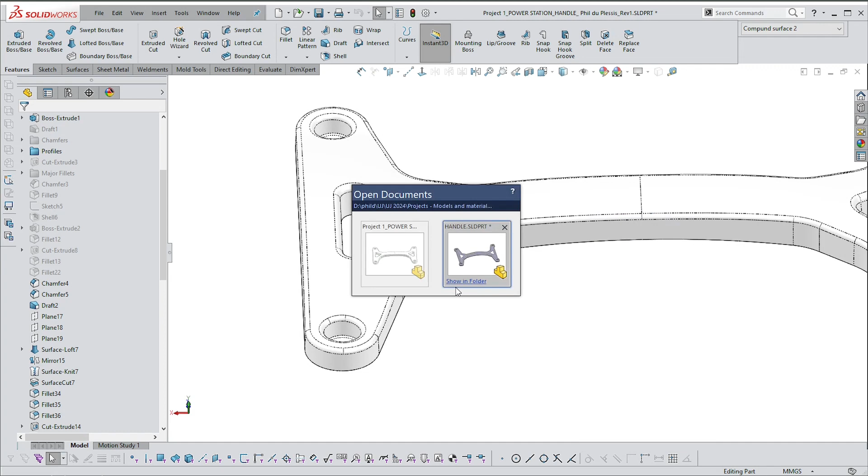It should be just an overall shape. I mean, this could be more curved if you want, but that fillet there, or that chamfer there, is a transition from one to the other - for aesthetic, for cleaning, for usability, and mostly for injection molding reasons. All of those reasons together go into making that feature smaller. It should be smaller than these corner fillets.

I think this one is 5 or something, or 10. So that's 10, and this is 8, but 8 is still too large. That's because, have a look at what's happening here - on the corners, we've got one fillet interacting with another. That shouldn't happen. There should be a land between the two.

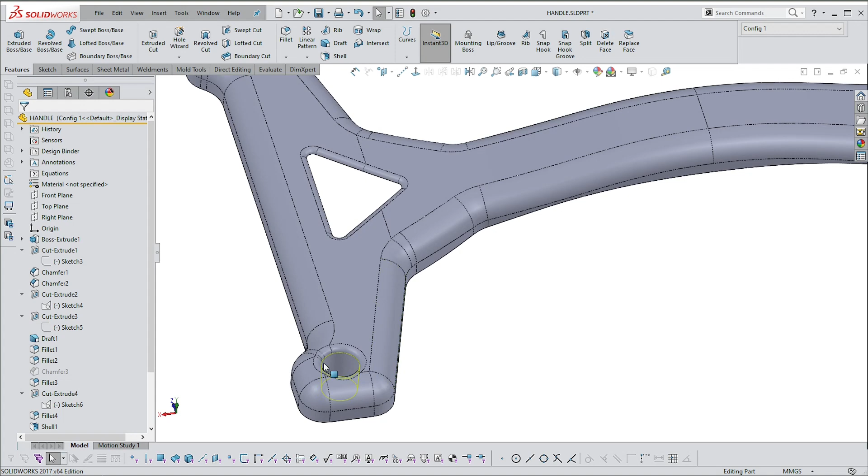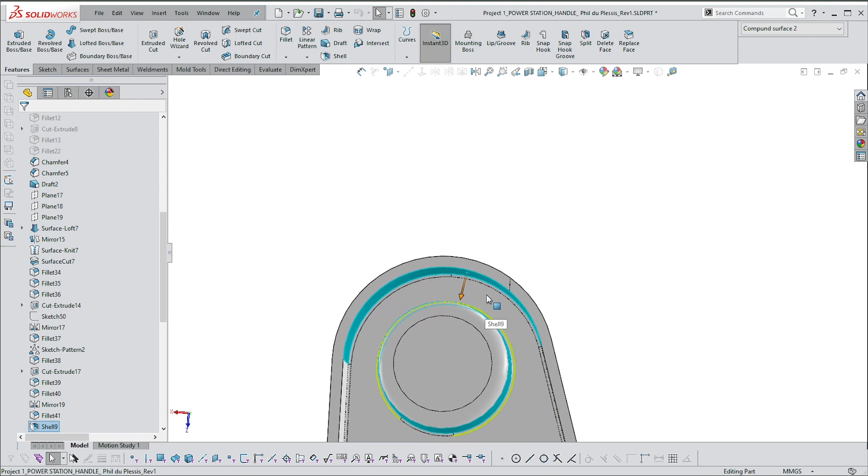So let's explain what that means - there should be a space between the two. That has to do as much with injection molding considerations - between that mounting boss interface and that wall interface, there should be enough space for enough material in the mold that it doesn't become weak or too thin, and that there should be smooth flow, because you've got to get the material to flow smoothly from one end. It's going to be injected somewhere in the middle here, and it's got to go all the way out to the ends, and then join together somewhere over here and knit without creating knit lines.

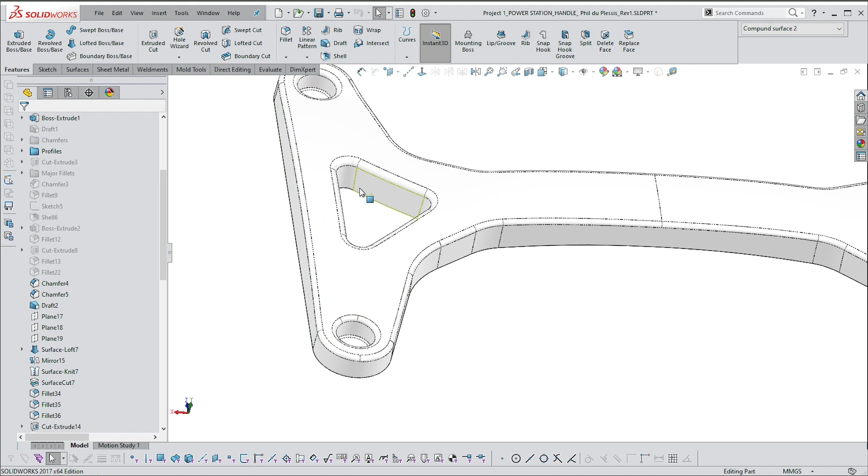So all of these surfaces - a lot of you have given me a sharp edge in here, very bad. I'll show you what I mean in this one here. All right, so design considerations, very important.

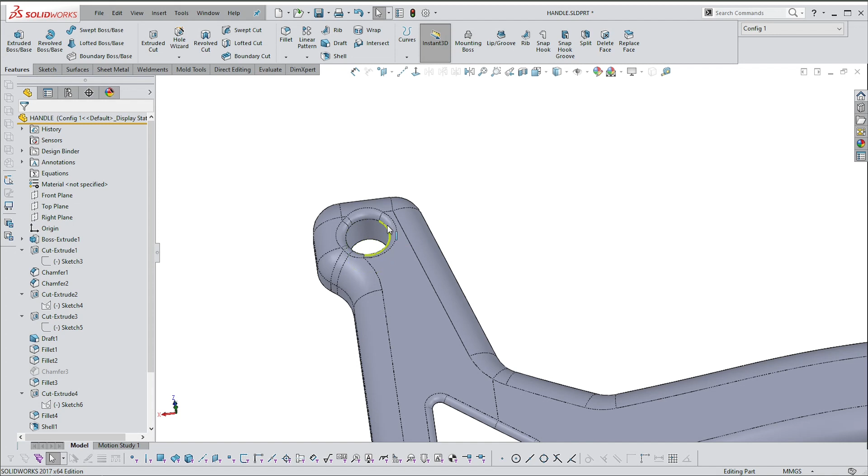Many of you have given me a hole all the way through, a shaft. It's not what this is - this is a mounting boss. Please, it must be a mounting boss. It must have a land on the bottom with another hole so that a screw can actually grip that hole on the land and connect this to the other thing. Otherwise, this is not doing anything.

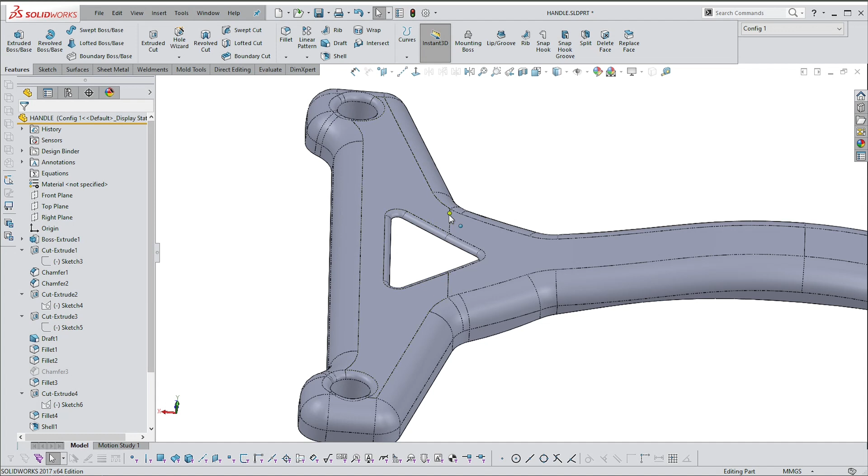Likewise with this feature here, this cutout - the cutout can be decorative, but then it must also contribute to the strength. So let's address that one there, this triangle, while we're at it. That's because whoever did it, and that was a few of you, put the triangle cutout beneath the shell cutout, and it should be before it.

I don't care if there's a modeling problem that's created by that. You are here to tell the program what you want, not have the program tell you what it can do. You must overcome those obstacles, and they're fairly easy to overcome by just making sure that everything is tangential. I'll show you how that works in a second.

So many of you have not got, for instance, these fillets. Let's just suppress it, and then let's add one in here just to show you what you would have - 2 millimeters, I think. Okay, this is not in any sense desirable.

One, from a molding point of view, you're not allowing material to flow very nicely. Two, from a strength point of view, that's creating a stress point. You don't want stress points. It's an actual thing that happens where materials can't go around corners properly, and then they create stress lines. So that's a place where this handle's going to fail, it's going to break.

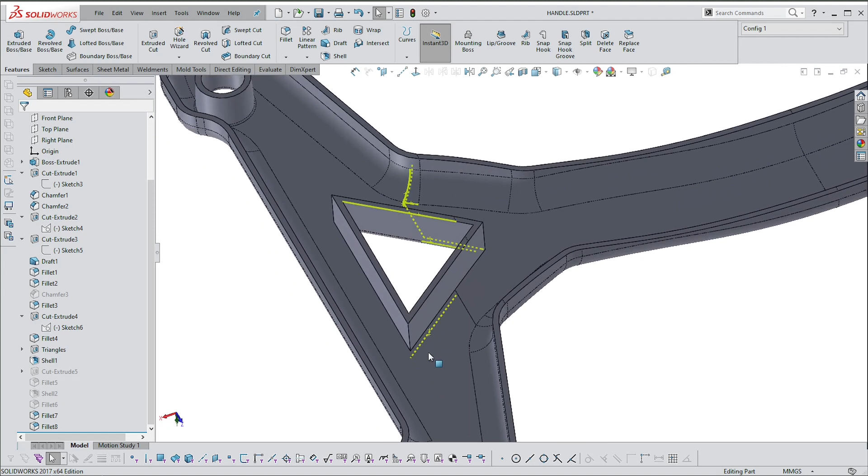To create the mold is very, very difficult - you've now got these sharp edges on the inside and on the outside. So nothing about that makes sense. It should be a nice largish fillet - that one's too small.

Let's say 5 or something. Okay, it should do something like that. All right, so those are the design issues.

Aesthetically, then the other one - many of you have given me a handle which is like 80 millimeters wide. I don't know how anyone has a hand that size to grab a handle that big. Please make your handle the right size. Have a look at the anthropometric data.

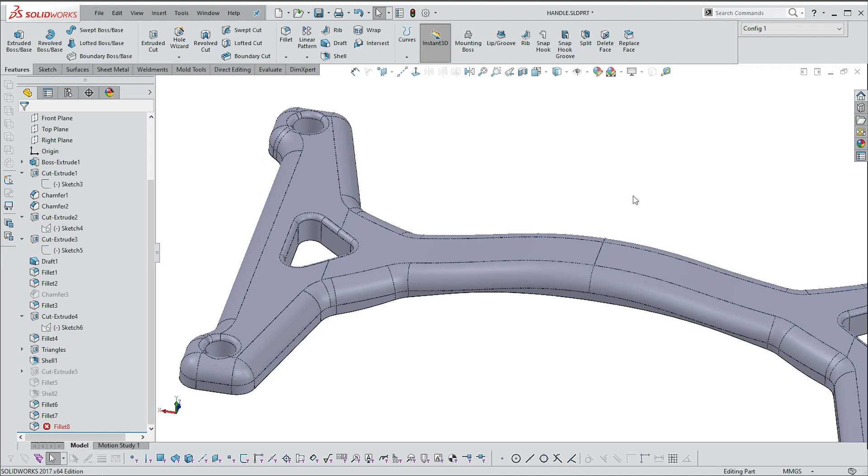I think the diameter is somewhere between 30 and 40, I may be wrong, which is optimal for people to hold. So find out what that diameter is, and then the circumference of that diameter will give you the sort of measurement. So you can actually measure here.

I'm not sure if I'm going to be able to get this right, but you can keep clicking these. 1, 2, 3, total length 40. You can see he has 40. So probably total length of around 80 or 70 if you go all the way around.

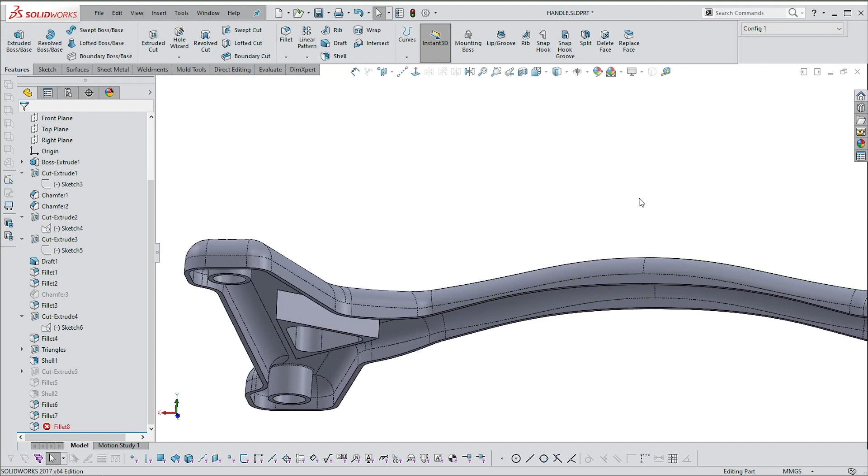A few of you also give me very dramatic, swoopy handles, which give you just a smidgen in the middle that's optimal to hold, and the rest is so wide it's not nice to hold. So please look at that.

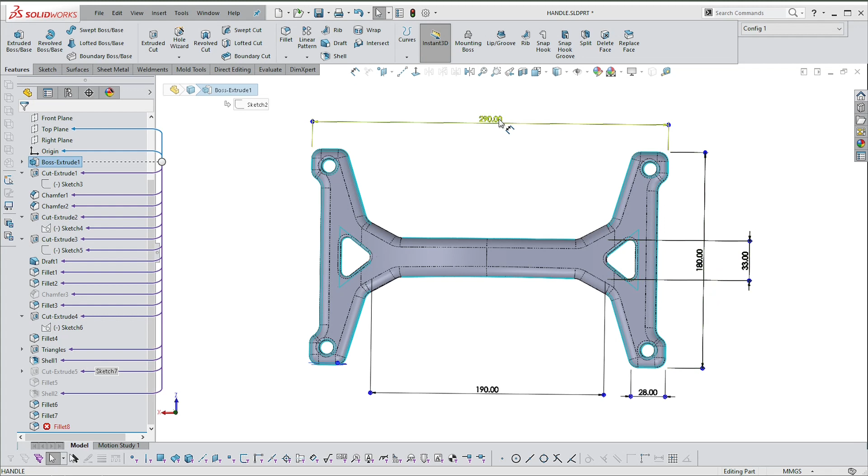Some of you have also given me - let's go to this item here. You can see the footprint here is 290 by 180. Please stick to that, 290 by 180 is about an A4 size.

If you give me a handle which is 120 millimeters by 80 millimeters, if I measure that on a ruler, go and do it for yourself. You should be able to shake your own head and say that's ridiculous, the handle can't be that size. We're designing for the real world, real products with real aesthetics, real design considerations.

I'm looking for those things. I will be marking you accordingly to them as well. All right, so now to the actual technical aspects of the sketches.

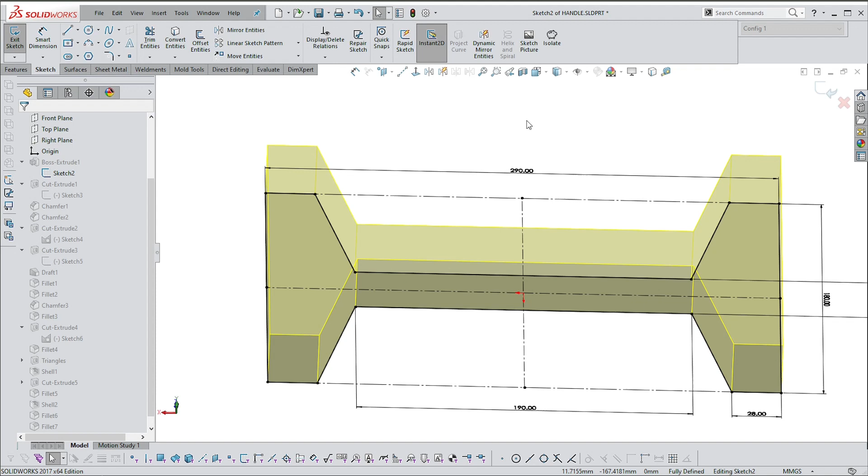Many of you will have given me a sketch which looks something like this. I've actually resolved this, so I'll have to unresolve it. Not sure where that is. Let's just get the midpoint, probably coincident, and midpoint. There we go, that's gone.

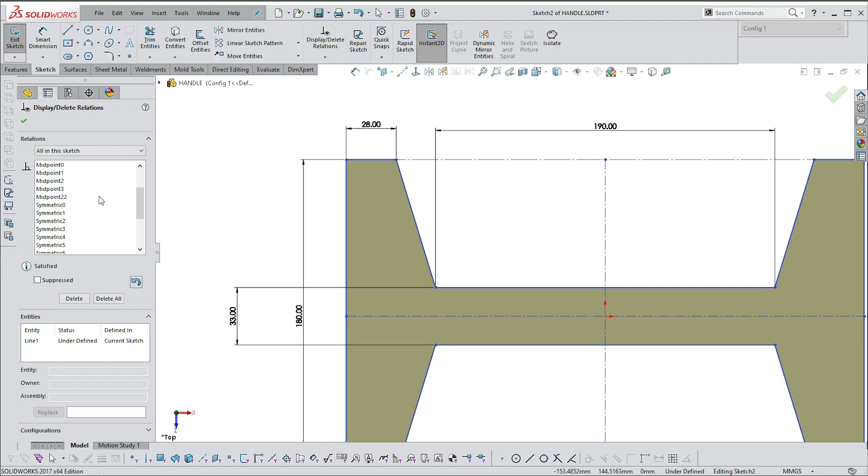So you will have gotten a sketch which is fully dimensioned and is a good sketch because it's nice, it's closed, it's gone grey in the middle, but it hasn't turned black. It must turn black, full stop, no questions asked. If it doesn't turn black, it's not fully defined. The whole thing must turn black, especially on a simple sketch like this.

On splines we're going to be a bit more lenient for now, until later. You will have to then make sure that happens.

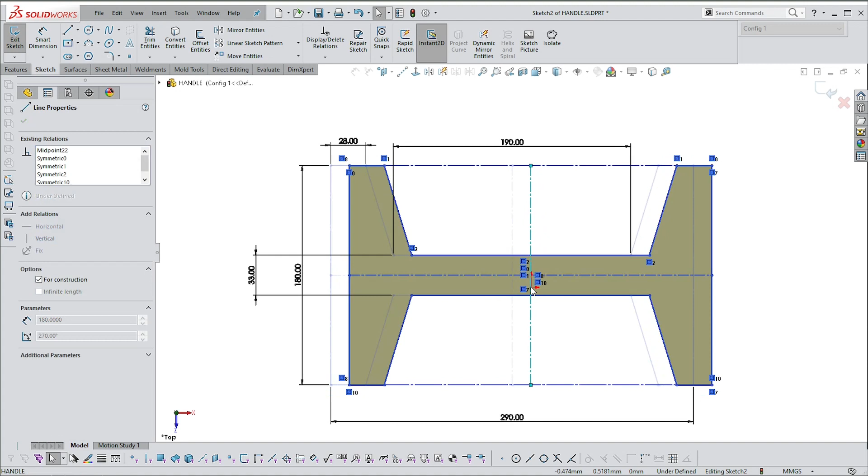What you can try to do here is grab the center point, drag this out. No, you can't - all right, so you can drag that out, and then here you might be able to drag this back onto that piece. But if you can't, like I can't, just Control select between that midpoint. Make sure the center lines meet the bounding box, whatever that bounding box is, so you're grabbing the center line of both of those lines. Grab that point and then make them coincident, and that turns fully black.

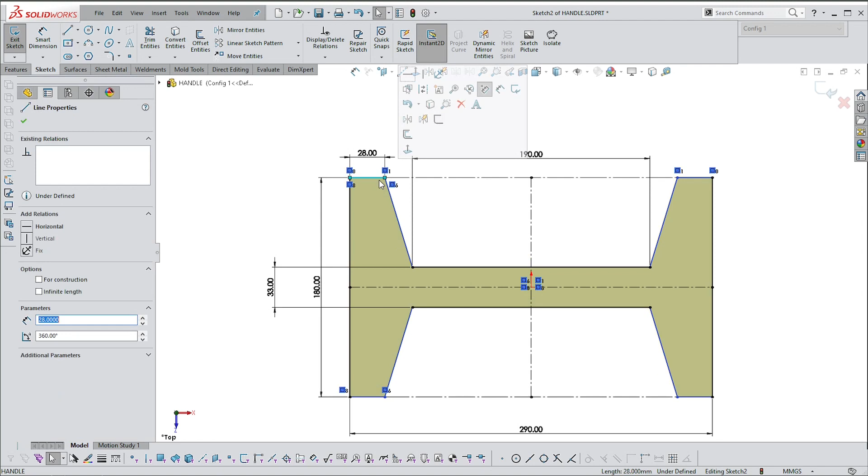Although it's not fully black - I think we're missing a dimension here. What are we missing? So what you can do is drag it. There we go, okay, I can see what's wrong. So that just means this here needs to be one of these, or both of them need to be made horizontal. There we go, fully black.

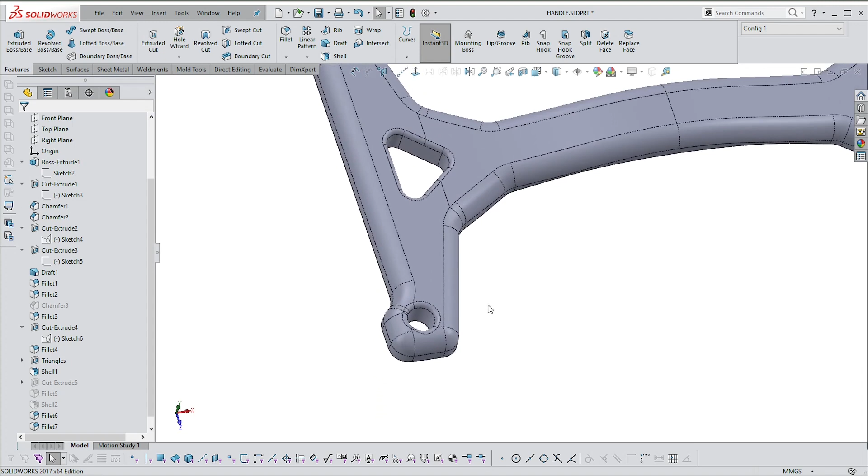And that's what I'm looking for. Sorry, one thing I didn't speak about here - the rationale for this particular shape. Originally in my design, the original sketch was squared off, which is what most of you have got, and then I used that to show you how you can create a completely rounded-off end.

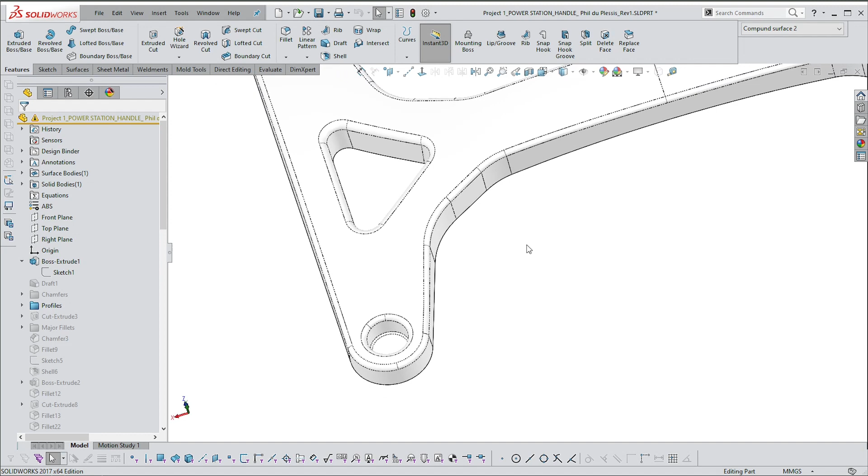So this design has a rationale to it, which is that here's the mounting point. The arms of this item wrap around that mounting point in a uniform, rational fashion. That's rational just from the point of view of visuals, but also from the point of view of what makes sense as a design feature for tooling and for mold flow and all sorts of things.

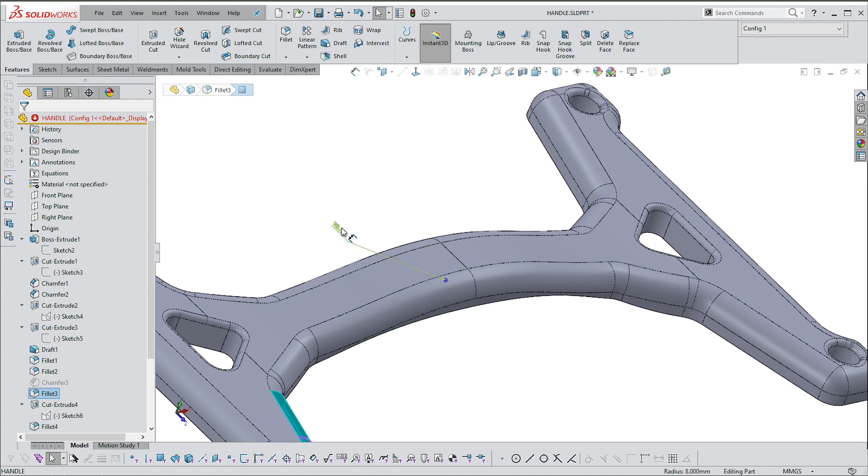So this is not nice. This is not acceptable. I want to see something more considered than this. This is just thrown together. So let's change this and see what happens. Okay, so that's looking better immediately.

This might make sense if this cutout were a little bit more considered. So let's have a look at that cutout, because this is what I'm also seeing a lot of you doing—seeming to copy from one another quite a bit. Please watch out that you don't copy other people's mistakes. Please don't hand me a sketch like this.

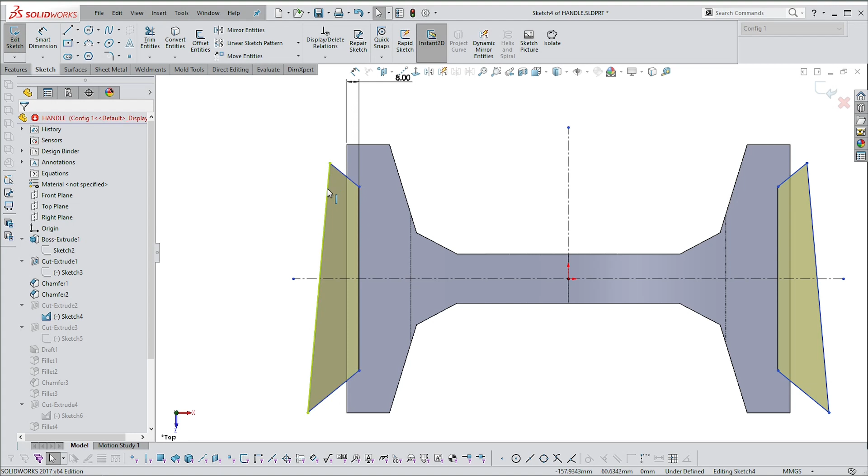It needs to be fully defined for a start. So give me one offset dimension—that's good—but it also needs to make sense as far as being something which is fully controllable. You can only do that when you're systematically making things vertical and horizontal when they should be, giving items dimensions where they should have dimensions.

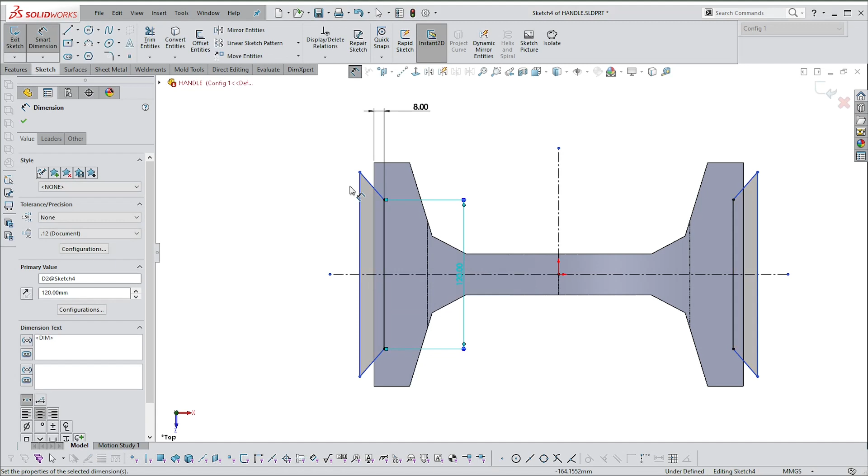This should either have an angle or have a dimension over here, one of the two. And then this should be controlled as to how far away from the edge it is. So that should then be something like that, and make sure that they are mirrored on both sides.

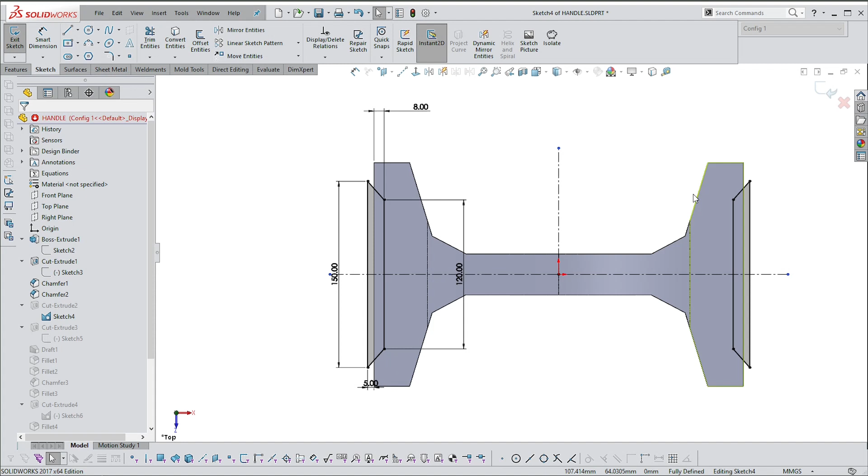Okay, so that's looking more acceptable. I would round these a bit more, and I would make this a little bit smaller to give a more considered space around here. This doesn't have to be fully symmetrical by any means, but give it some space.

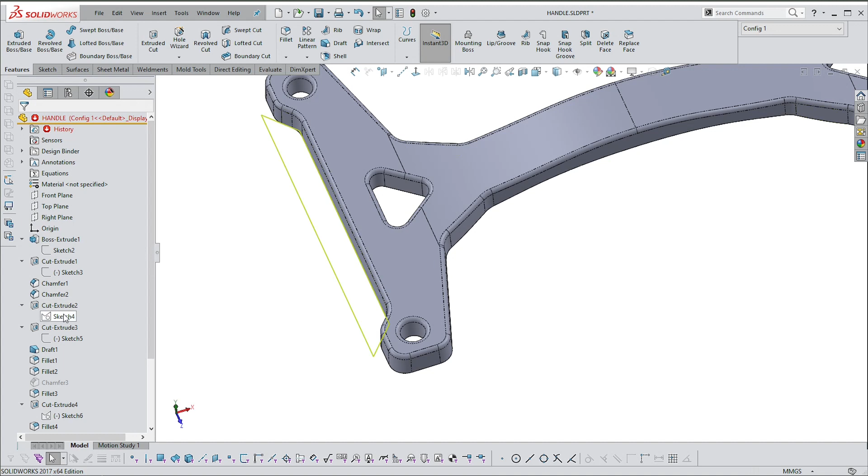Okay, so what else? We've dealt with that. Let's deal with this sketch. Here, a lot of you have done this, right? So you have a spline, which is great, and it is.

I can have a look, and I can see that you have the symmetrical marks here—I just mouse over and I can see the symmetrical marks. I can see that it's tangent in some way, but you're not giving me full tangency. In fact, I've probably fixed this up already... no, I haven't. This line needs to be tangent to one of its edges.

So let me just get rid of this line. Okay, so that line should be tangent to this edge—tangent. So I'm going to look for those marks. I'm going to go in here, and if I don't see a tangency, that's going to lose you marks.

So this doesn't have tangency. Click on that edge, that edge. Come on, that did not work.

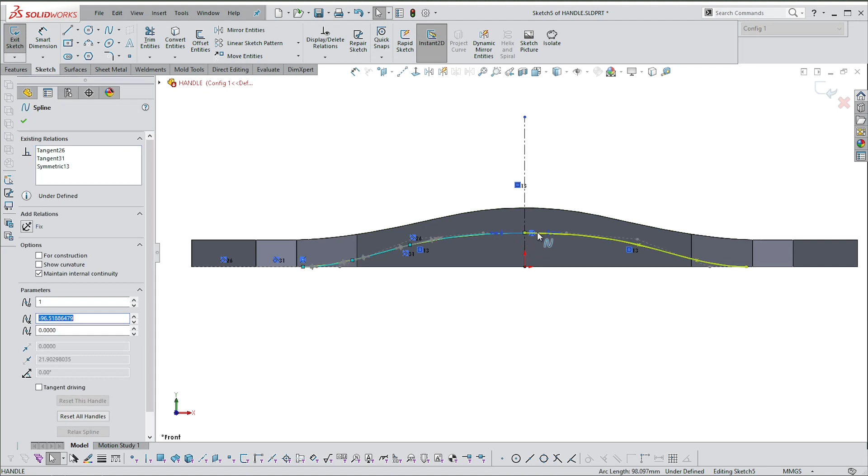Okay, tangency, and then these two should also be tangent. At the moment they are tangent because I put that in, but many of you don't have it, so make sure if you've mirrored an item across, it does meet as a tangency. You can check its tangency by not being able to pull these handles up or down—you can pull them left or right, but not up or down.

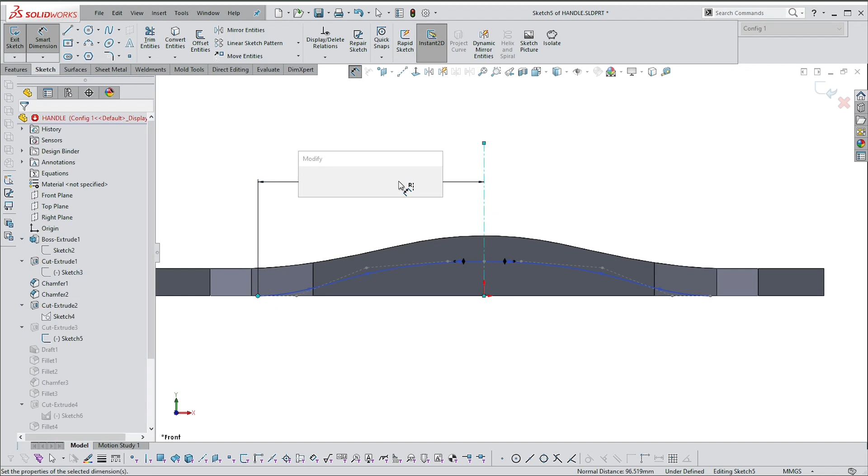Okay, and then many of you have dimensioned to the center line. It's not what I'm looking for—it must go across the center line. So this is not okay, and you should have some dimensions in here. So it should go from there to there, and similarly from that point to that point.

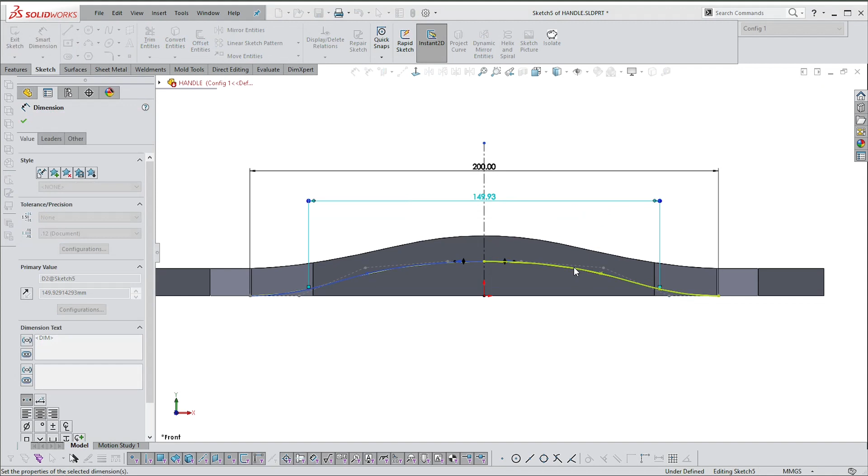Okay, so I think that kind of covers it. If I've forgotten something, you can send me a message.

The chamfer side—yeah, okay, some of you have put chamfers in, and I've had a look at your geometry, and I can see why you've put in very large chamfers. It's because smaller ones wouldn't work, and that's primarily due to the shape at the bottom not having sufficient tangency.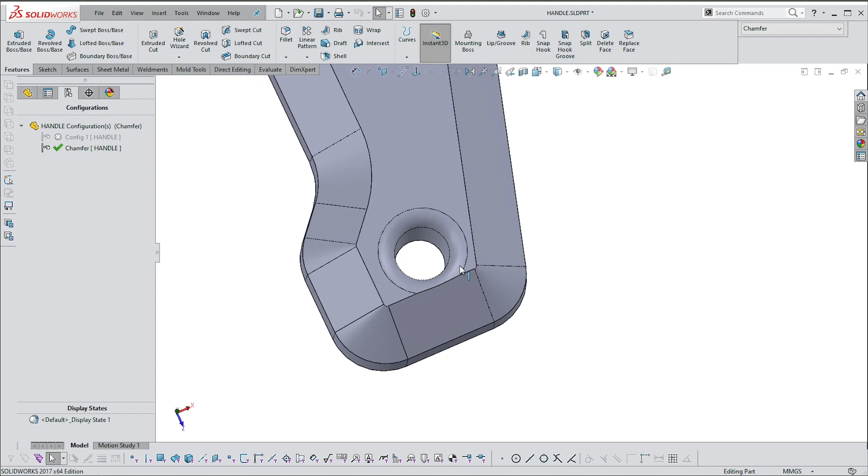This is completely unacceptable. This, as far as a manufacturable thing, is like a nightmare. You can't hand me this and say you still understand injection molding—this is not how you would do it. So please make this a reasonable size.

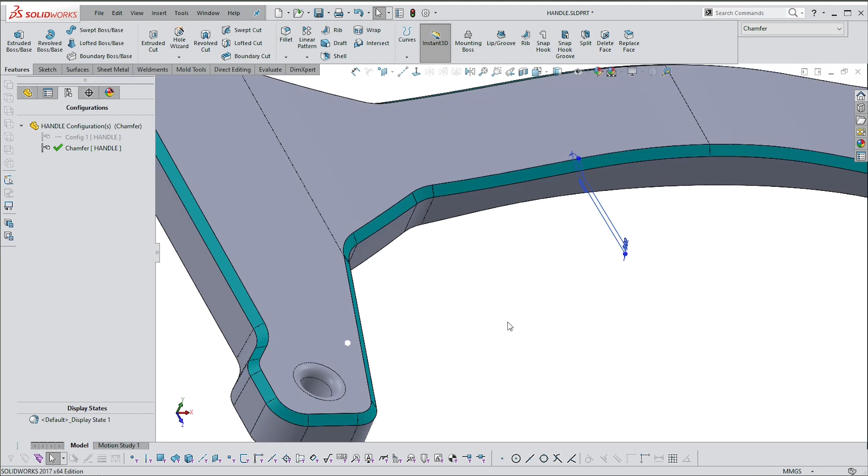And if the geometry isn't working, if it's not doing what you want it to do, it's because that plane and that plane are not tangent. So that's going to create problems over here. And then some of these items might not be tangent either—also going to create problems.

There's a sort of disunity in terms of the way you created the sketch. If you're slightly offset, it can upset the geometry of your item. All right, so that's that. I'm going to move to the drawing side of things in the next video.